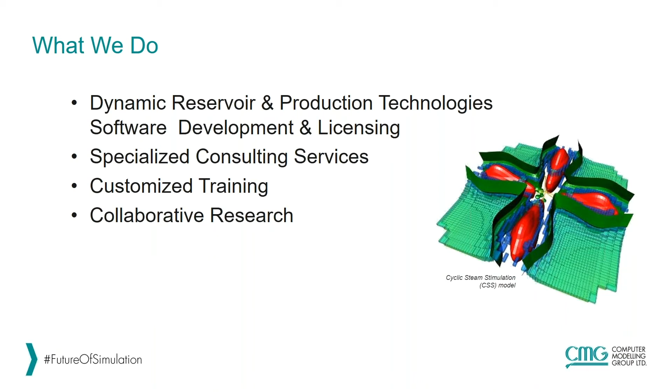To start off, just a quick review of what it is we do and who we are. We have been a leading developer and distributor of dynamic reservoir and production technologies in terms of our software development and licensing for over 40 years. We have specialized consulting services and support in order to help our clients around the world. We have customized training, including online training options, which have been rolled out this year in response to the highly changing situations that we've all faced. And of course, collaborative research efforts, which we partake in with various universities and research groups around the world.

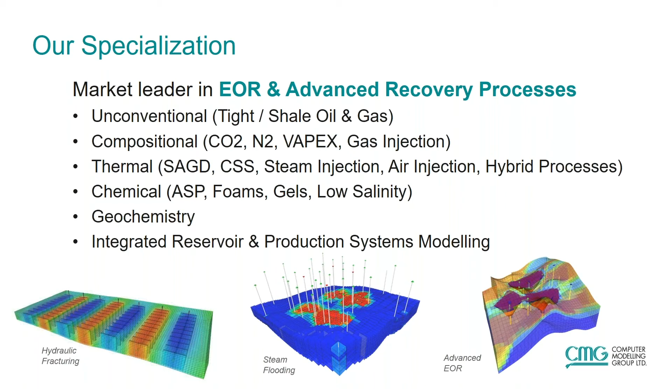Our specialization has been and continues to be the market leader in EOR and advanced recovery processes, and of course, some of the non-advanced processes as well. These include unconventionals, such as tight and shale oil and gas, as well as EOR in those. Compositional, such as CO2, VAPEX, complex gas injection, thermal. Here in the Canadian region, we see quite a bit of this. I'm sure in some of your regions you do as well. Steam injection, air injection, hybrid processes, chemical in terms of ASP, polymers, gels, anything you can really think of. Geochemistry has been a big push over the last couple of years. And of course, our integrated reservoir and production systems modeling, the ability for us to model the full and complete networks coupled to the actual dynamic reservoir models.

Our product suite has continued to grow over the years. We currently have our 3 primary simulators, IMEX, GEM, and STARS. Our CMOST AI tool, which is utilized for history matching, optimization, and uncertainty analysis. Our Builder and Results pre and post processors, WinProp for modeling fluid behavior, and our newer products, CoFlow and CoFlowX, which are used for modeling of the surface network side, as well as coupling of that with the dynamic reservoirs.

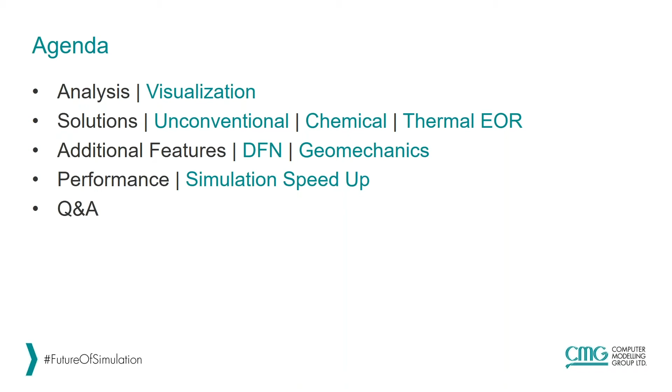Today, we're going to be going through some of the major features that were implemented in the new general release. This isn't going to cover all of the features that we have implemented in the new release. In order to see the full documentation on what these new features are, you can check the what's new documents available when you download the software. The way that I'm going to break down all of the new features is first I'm going to talk about analysis and visualization specific with Results and some of the new features that were implemented there. Then we'll talk about some of the solutions specific to unconventional reservoirs, chemical and thermal EOR processes. We'll also talk about additional features that are shared between the simulators, IMEX, GEM, and STARS, things such as DFN, which is a new discrete fracture network modeling, as well as some geomechanics. Then we can talk about some of the performance enhancements that we've implemented in the new GR 2020 as well, resulting in much greater simulation speed up.

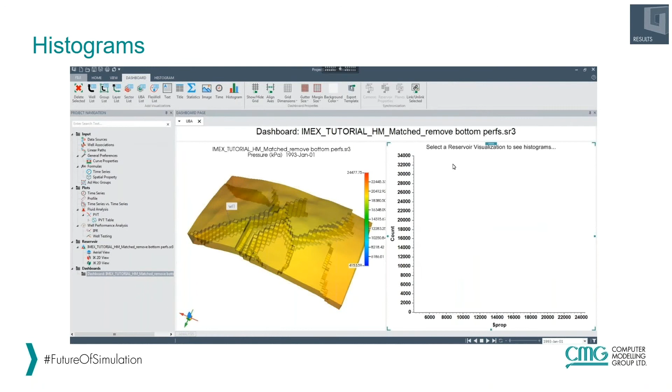First, I'll talk about the visualization analysis specific with Results. The first feature I'll mention is going to be histograms. I already have a dashboard loaded here in Results 2020. To add a histogram, you'll click on the histogram icon in the dashboard tab, and that histogram will show up side by side with your reservoir.

The histogram will show a distribution of the values of whatever reservoir property you're viewing, and you can also sync this information dynamically with time, as you can see here.

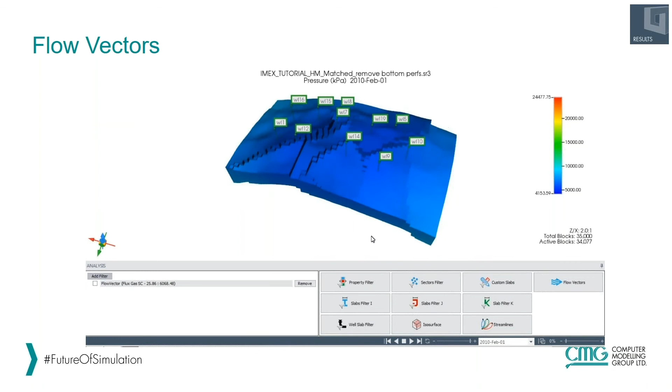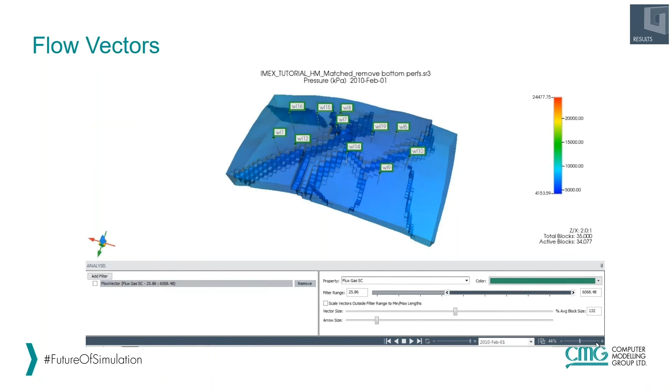We also have added the viewing of flow vectors into the new Results. Flow vectors just require an output keyword in the respective simulator, and to view these flow vectors, you will see a new flow vector icon in the bottom right of your 3D view in Results. I'll go ahead and set a transparency to my reservoir so that we can see these vectors in 3D, and then I'll click on the flow vector option to activate it.

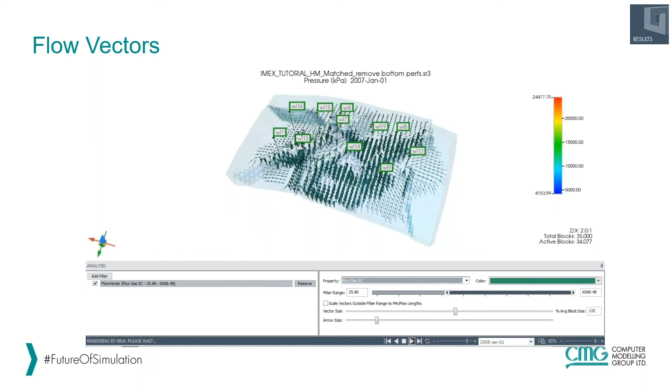I can view my vectors specific to a type of fluid such as oil, water, or gas. And I can also view these vectors dynamically with time as well by clicking on the play button. As you can see here, I am viewing the way that my gas is going to move throughout that reservoir with respect to time.

Well bubble plots have also been added as a new feature in the GR 2020. To add a new bubble plot, you would go into your 3D view of your model, then up at the top, go into your wells tab and choose the option to switch on your well bubbles.

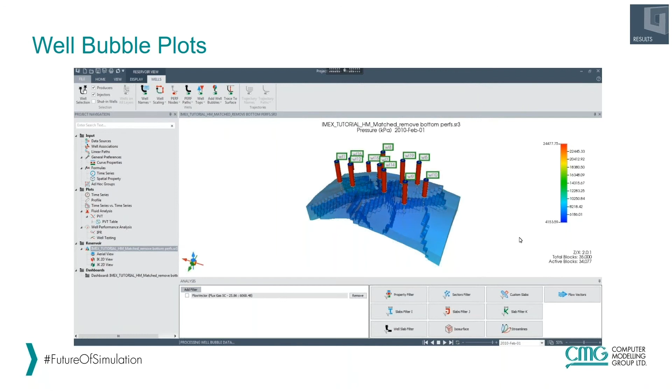By default, the well bubble plots will plot your breakdown of oil, water, and gas, but here on the left side, you can also add and modify exactly what sort of production information you would like to see from the list shown. I'll go ahead and click close here and click play. And as you can see, the well bubbles appear at the wellheads, and I can easily view my production for my oil, water, and gas for my respective wells, all in the same view.

Results Report is a text-based results output software that was previously only compatible with our older SR2 file systems, which are the IRF and MRF files that some of our more experienced users probably remember. In order to use Results Report in previous versions, it would require an additional simulator output. For the latest release, we have made this software compatible with our newest SR3 file system to give our users more flexibility on how they want to output their results.

To use this software, a text-based template is used to define exactly what information needs to be output. It is submitted to Results Report, and then the results are outputted into a text or Excel-based file. Results Report is very useful for obtaining specific information for layers, groups, wells, sectors, and special histories. You can also output custom tables for comparing multiple runs, tables importing directly into economic analysis packages, and also extracting specific grid information and arrays.

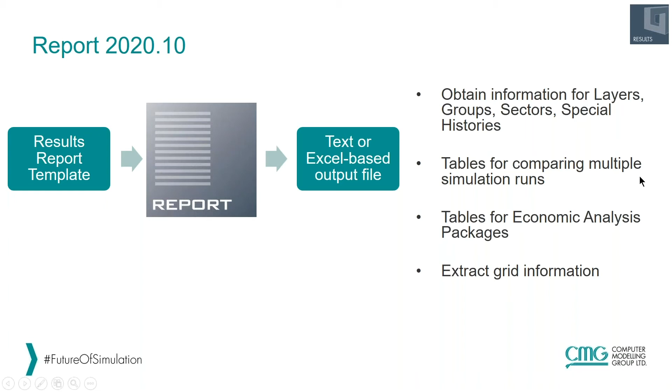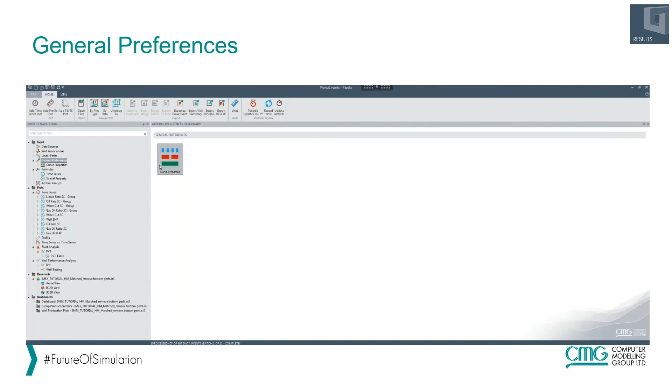General preferences, so users can customize their plots and have these customizations applied to every new project that they open, are now available. To change these settings under the input section, click on the General Preferences option. From here, you can choose specific line colors as well as apply these changes to specific well, sector, layer, and special histories information by going into the Settings option. You can also filter this information by searching for it.

If I wanted to see my rates in standard conditions under the wells option, I'll be able to do that. As you can see, by default, our gas production is set to red, oil is green, and water is blue. However, you can customize that however you would like. You can also set different options on how you want information from different files imported in. This is currently set up to use a dashed line with the same color for viewing results from two different data sets. You can also apply all of these same options for any sort of profile plots by checking that up there in the top.

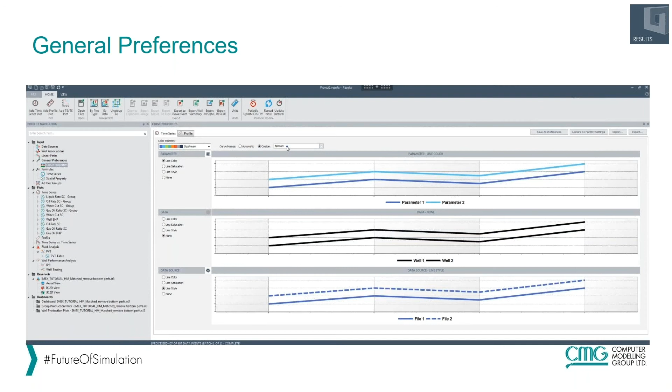Another new option to make analysis a little easier for our clients is the ability to view your trajectories and wells through all layers. Previously, a perforation could only be seen in 2D view if you were viewing that specific K-plane that the perforation existed in. Now you have the option to show all perforations from an aerial view or a side profile by clicking on the Wells on All Layers option under the Wells tab.

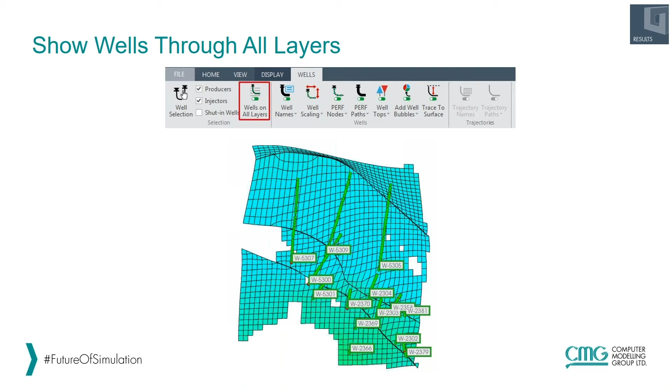One feature that has been heavily requested is the creation of ad hoc groups in Results. Previously, in order to view group information for specific groups of wells, this needed to be predefined in the simulator, or you had to make a custom formula summing up the production from specific wells. Now you can create ad hoc groups on the fly within Results.

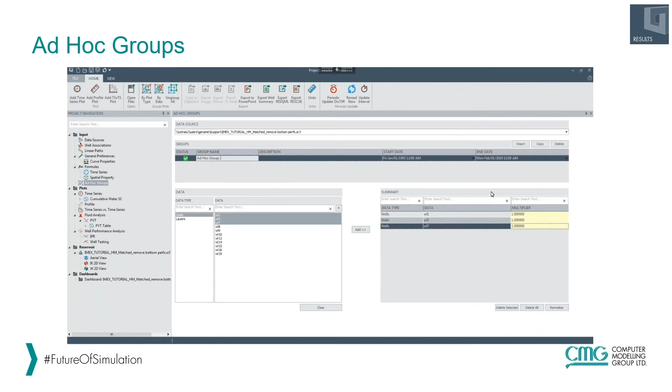This option is located on the left side, and to add these in, you would click on Insert in the next window. I'll keep the group name as ad hoc group 2, and as an example, I'll add wells 1, 5, and 7 to my new group. You also have the option of applying a weighting factor to each of these wells.

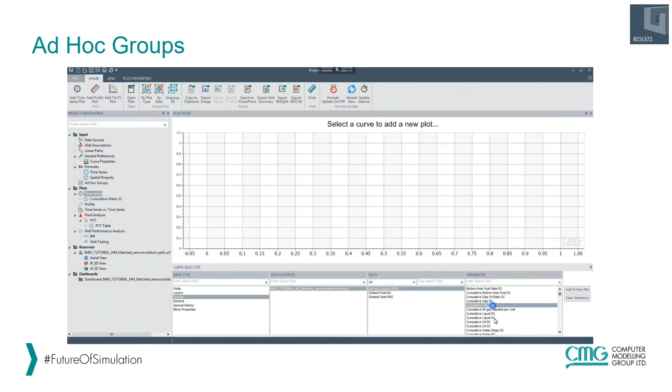Then when you go to your time series plots and go to groups, you should be able to see the new ad hoc group available for plotting. And in this case, I'll be able to see the combined cumulative gas and oil production for wells 1, 5, and 7.

There are many options already available inside of Results in terms of exporting data, such as exporting images, exporting movies or videos. You can also export your well and reservoir data to an Excel-based format, and also do a bulk export of images into a PowerPoint format as well. Exporting a well summary is an additional option for exporting very specific information in certain columns into an Excel format.

One export that is new to the new version of Results is exporting a RESQML, which is a widely used format for importing and exporting grid structure information, reservoir properties, well trajectories. That means that you can take your reservoir models from Results and directly import them into any sort of geomodeling software that you are using.

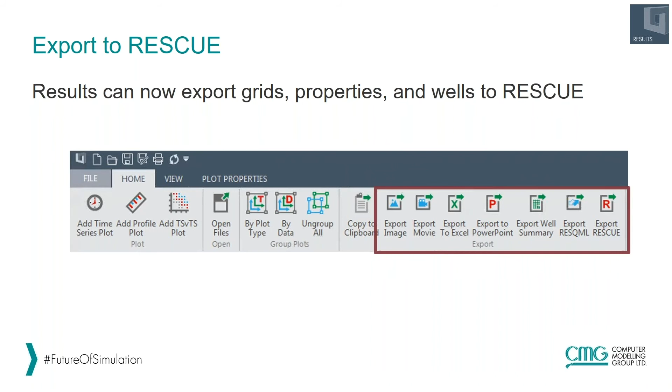Next, I'll talk about some of the new features that were added specific to unconventional modeling. We have added a lot of functionality in the way we process overlapping and crossing hydraulic fractures in Builder, as well as our simulators, IMEX, GEM, and STARS.

This new process ensures much faster load times within Builder, more accurate modeling where different hydraulic fracture definitions share the same grid block space. As you can see here in the image on the right, I am showing a side profile of hydraulic fracture planes that actually have hit and are sharing the same grid blocks between the hydraulic fracture planes.

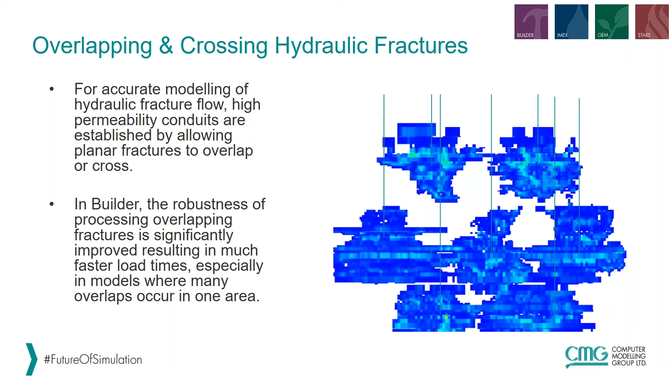We also have implemented greater control for our users to define their non-fracture zones. Non-fracture zones are the main grid blocks shared by the planar fracture blocks, but aren't the planar fracture blocks themselves. This area, whenever you're hydraulic fracturing, will typically have some sort of increased water saturation or enhanced permeability, or even different types of rel perm curves due to the nature of being near the wellbore while being fracked.

By default, the non-fracture zone is extended past the fracture tips up to the full grid block, which you can see on the left image. This new option allows users to specify the non-fracture zone as ending precisely at the fracture tips, allowing more accurate modeling and more flexibility when history matching your models, which you can see on the image on the right, using the option for NFZ alignment on.

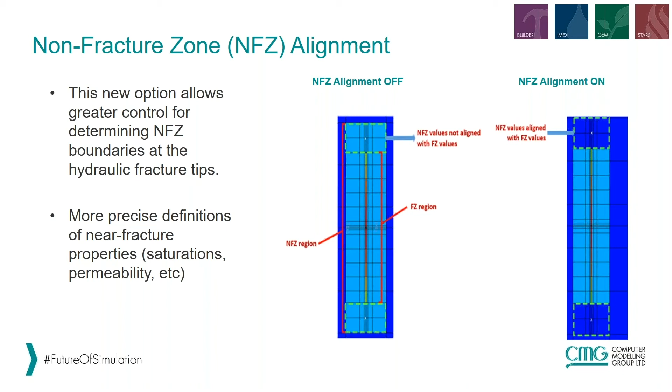We have also added an option to define fracture height in terms of a distance, such as feet or meters, instead of using the number of grid blocks up or down. This option just makes hydraulic fracture modeling a little bit easier, as you don't need to calculate the number of grid blocks with the grid block width or grid block height in order to get the proper frac heights.

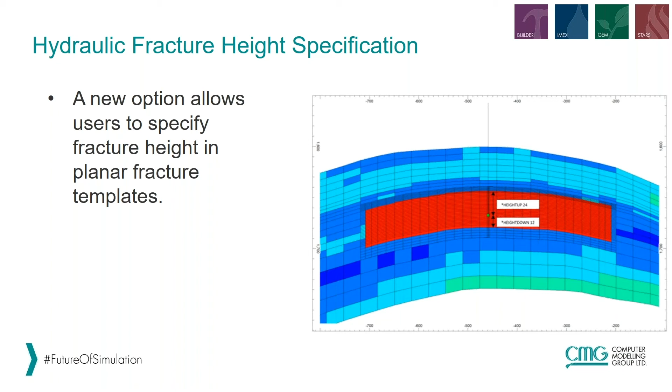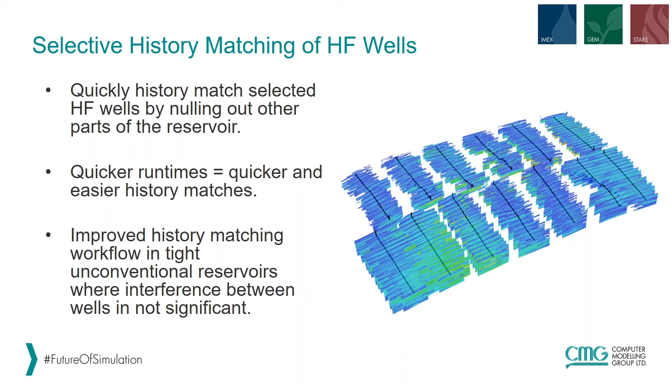For full field models of hydraulically fractured reservoirs, we have added a new feature that allows users the ability to selectively choose specific hydraulic fracture wells to history match by nulling out the rest of the reservoir. This would be very helpful for cases where you're just trying to get better matches in specific parts of the reservoir or specific wells, as the runtime would be dramatically decreased, resulting in much faster history matches. Users can then take their new matches and easily apply them back to the full field model by turning this feature off.

We have also introduced the new data import wizard specific to hydraulic fracture injection data, which typically can have data points every second, which is a bit overkill for simulation. This option is available under well and import production injection data. As an example, I'll choose to import frac injection data and import an example file that I have already made. I also have the option of adding in a tracer for each of these stages, which you can see here.

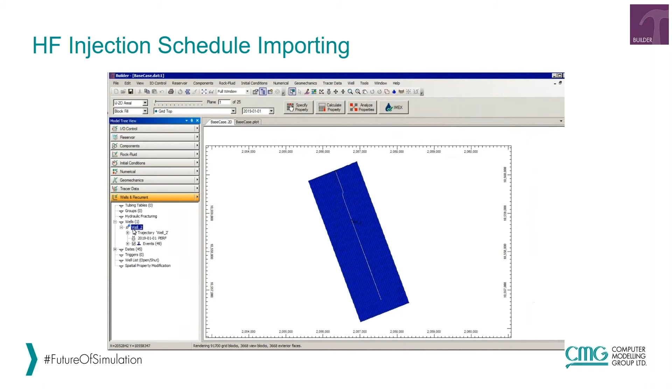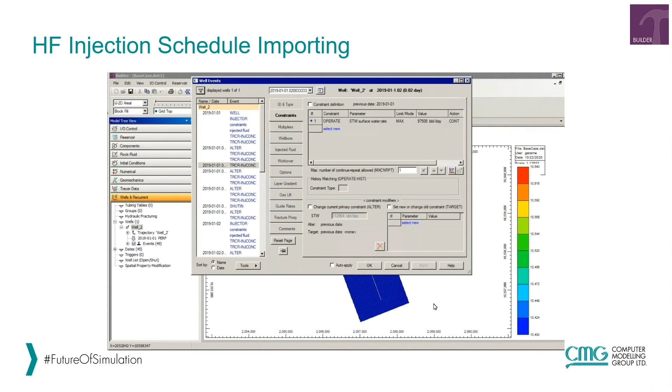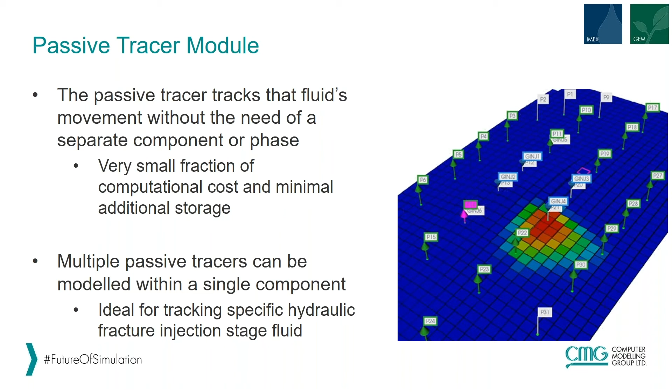Next, I'll talk about some added features pertaining to chemical EOR modeling. A new passive tracer option has been added into IMEX and GEM and can be applied to an existing aqueous or hydrocarbon phase, which results in very small fraction of computational costs and minimal storage, which leads to faster runtimes. Multiple passive tracers can also be applied to a single component or a phase. An example of this would be tracking multiple fracture injection stages in a single well and how that specific stage fluid moves through the reservoir.

We also have added in a feature to model rate-dependent adsorption. This feature would allow much greater flexibility for history matching adsorption and desorption parameters in core floods, or even large-scale models where adsorption or desorption is a primary factor for that specific EOR process. An example of this would be in models such as surfactant injection, specifically where the surfactant is being used for interfacial tension reduction, or even in models where certain polymers give some sort of wettability change.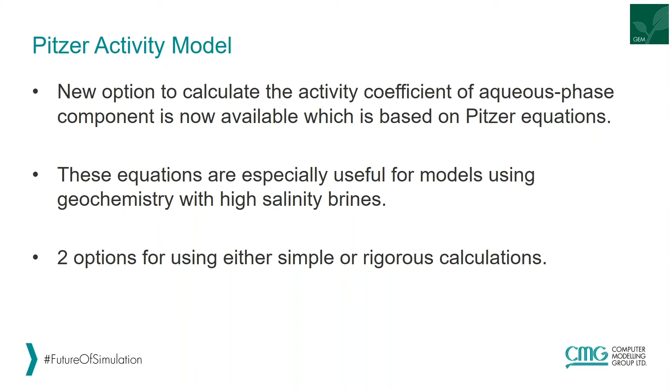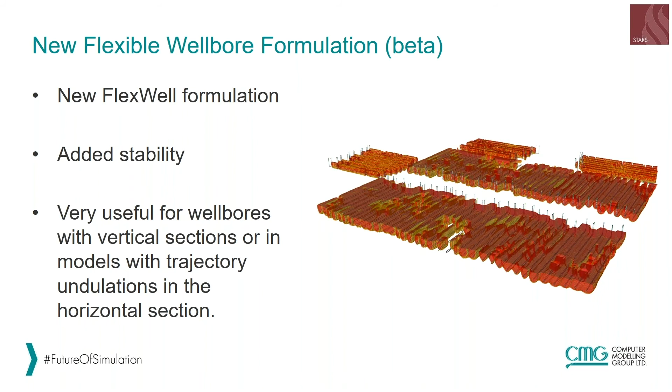Now, I have talked about a few of the added features within STARS already, in terms of some sort of shared feature. Next, I'll talk about one important feature inside of STARS that was implemented, and that's going to be a new FlexWell formulation. We have implemented a new FlexWell formulation that improves the stability to specific situations in models with vertical sections and maybe wells with trajectories with a lot of undulations in the FlexWell itself as an additional option. Now, this new formulation essentially just improves the stability of how these FlexWells do their calculations, which could result in a lot faster runtimes.

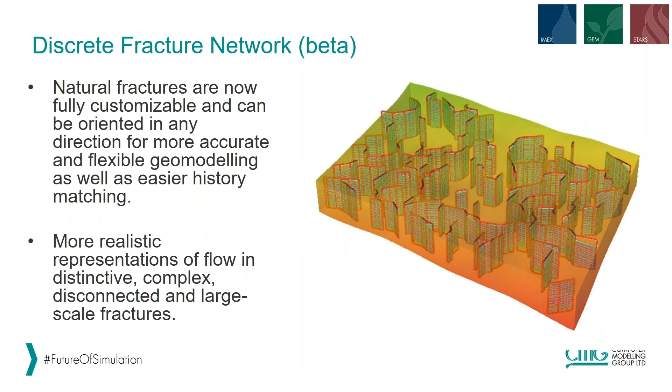Next, I'll go through some additional simulator features that didn't necessarily fall under unconventional, chemical or thermal EOR, but a lot of these are going to be shared features. The first one I'll talk about is going to be a discrete fracture network, which is going to be available in IMEX, GEM, and STARS. This discrete fracture network allows our users to specify their natural fractures and fully customize them. Now, these fractures can be oriented in any direction for more accurate and flexible geomodeling, as well as easier history matching.

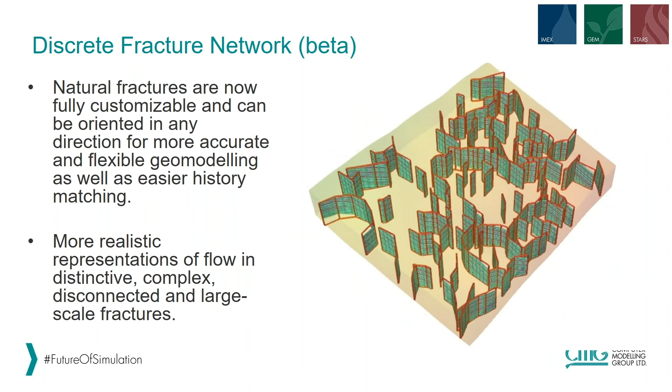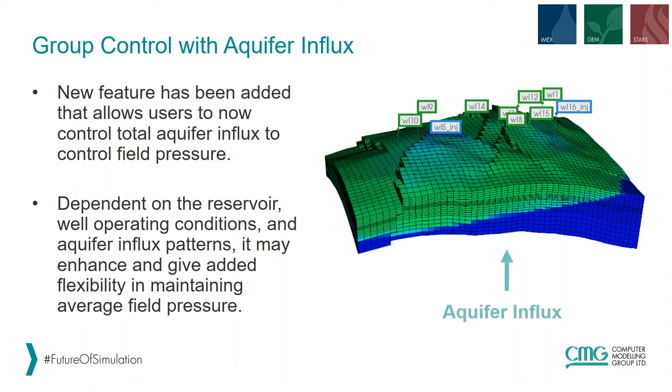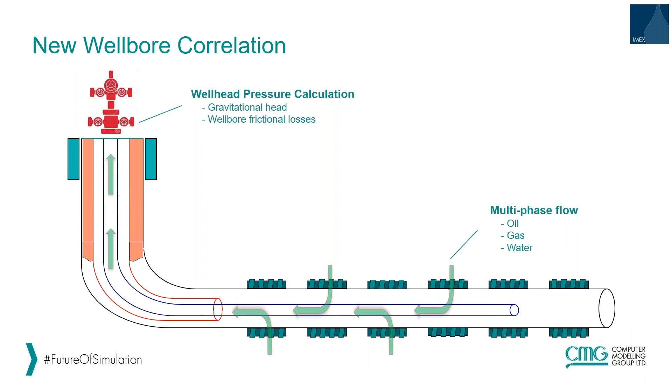The biggest difference between this new correlation and the old one is that this new correlation will take into account multi-phase producers. So for wells that have oil, gas, and water, you'll be easily able to use this correlation to calculate what your wellhead pressure is.

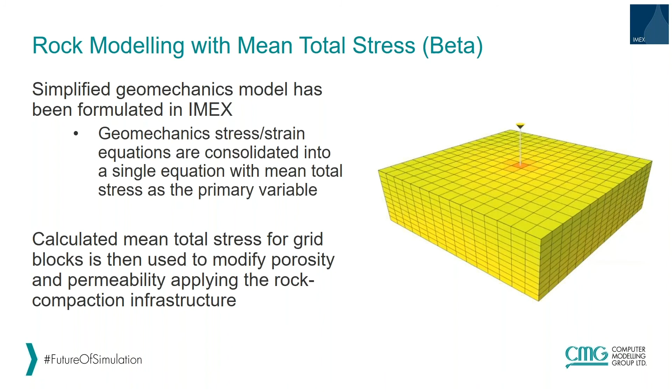One more feature we added for geomechanics is Kriging for initial stress distribution. When using geomechanics, one thing you need is initial stresses defined for each of your grid blocks. Typically this sort of information isn't available as an array for your entire reservoir. Typically, what you will have are points inside your reservoir where you know what the initial stresses are.

Then I can use the simulator to do a calculation, and it's going to use Kriging to calculate what my initial stresses are for the entire reservoir. This makes it much easier and faster than having to go in and define a set value for my initial stresses. It just takes the information I have and uses Kriging to apply it for the whole model.

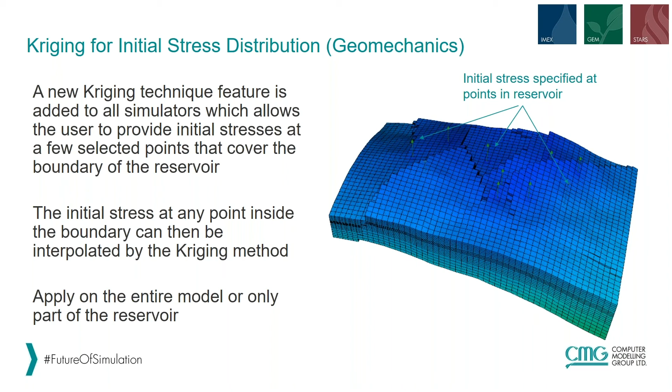The last section I'll talk about is simulation speedup. This covers all the new features we've added either to the numerical tuning section or features added specifically to help our clients history match their models faster.

MPI support is now available to all of our users. MPI stands for message passing interface, and it allows our users to run field scale models using pretty much an unlimited number of cores.

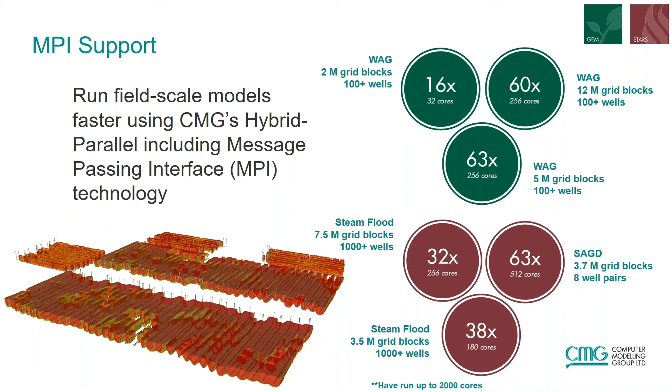We've also added a new feature called flux boundaries. This is actually available in IMEX and GEM last year, but now we've made sure to include that for STARS this year. What flux boundaries allow you to do is run a full field model, and let's say there's a very specific area inside your full field model that has all your wells, or just a very specific well you wanted to focus on and do history matching for. Instead of running your full field model with, say, 2 million grid blocks, you can implement a flux boundary where you take a smaller portion of your reservoir and specify the boundary conditions using that full field model.

As a case study, we took a STARS data set. It's a SAGD model with aquathermolysis, so it had 4 reactions in it, 4 well pairs, and 825,000 grid blocks. On 16 cores, this full field model took a little over 13 hours to run. By using flux boundaries and focusing along those 4 well pairs, we were able to speed up this model, and on the same 16 cores, it ran in a little over 4 hours. So a pretty substantial speed up.

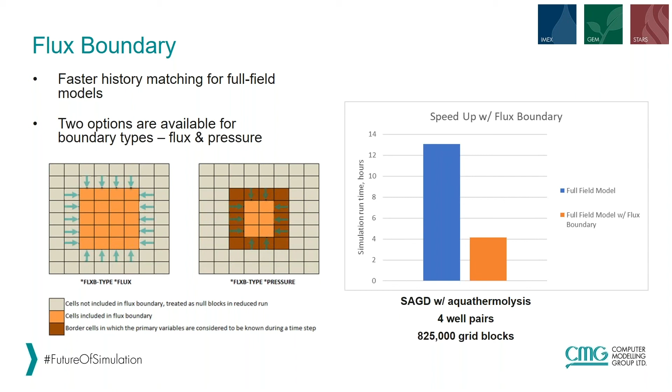And the last big feature I'll touch on for this webinar is automatic combinative preconditioning specific to IMEX. We've had a feature called combinative on or off previously available inside IMEX, and there are very specific reasons why you typically want to use combinative on or off.

Just as a review, combinative on is very good for high iteration counts, when you're first starting up frontal processes, and also when you have those really high changes in the grid blocks. Combinative on is a setting that tends to work very well and has very good stability when running your IMEX models. When you're in primary production mode, or even in a frontal process where things are very stable and the front is a little further away from your injector, you typically get low iteration counts, so combinative off is a good option to use.

Now what we've actually done inside IMEX is hard-coded it into the auto-tune keyword. The auto-tune keyword will scan how many iterations you're taking per time step, and it'll automatically choose between combinative on or off. That's essentially what's happening.

In some test data sets with IMEX, these models ranged anywhere between 72,000 to 700,000 grid blocks. Just running auto-tune with IMEX 2019 versus 2020, we were getting anywhere between a 10 to 50% speed up just by using these two different versions of IMEX. So a very substantial speed up just from going from 2019 to 2020, specific to this new automatic combinative preconditioning.

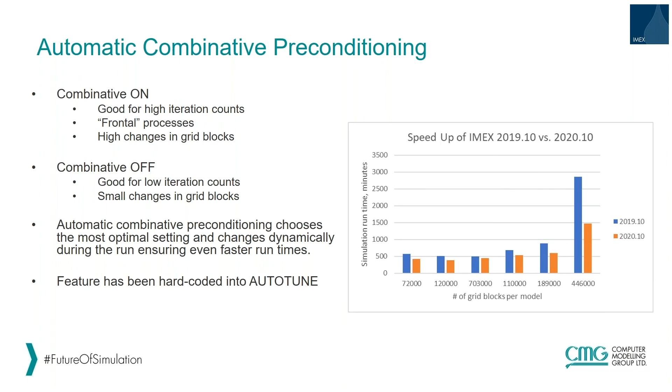So that concludes the What's New webinar. Again, I had only really touched on some of the bigger features implemented in GR 2020. For the full list of features, you can see the What's New documentation included with all of our software. And with that, I'll go ahead and pass it back to Jeremy.